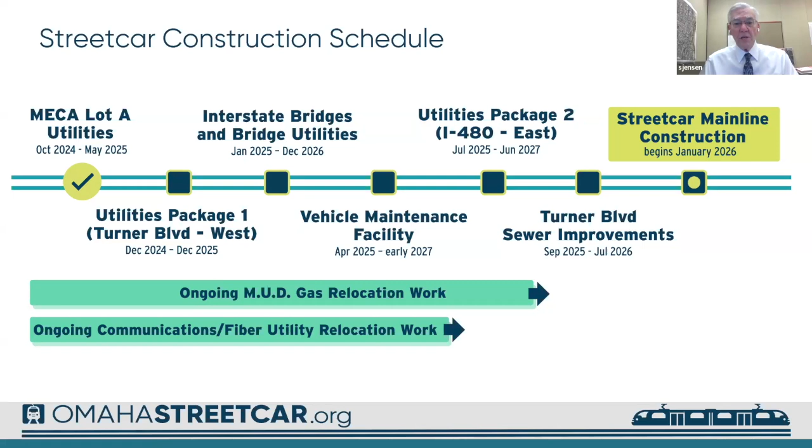So with that, I'm going to turn it over to Megan, and she can discuss the MUD work. Thanks, Steve. Megan? Good afternoon, everybody.

The remaining work for this phase, we're in phase 6 in Harney Street, includes individual gas work for Voodoo Taco, Jams, and the 406 Dubliner buildings, which will take place in the alley. For the Voodoo Taco service, we plan to extend our gas main from Farnam to just north of the Voodoo Taco building and then run their service west to the proposed meter location. For the Jam service, we plan to install their new service from the existing gas main in 11th Street to the southeast corner of their building. The alley work includes service work for the 406 Dubliner buildings.

After all gas service work is completed, our construction crew will come back to this corridor to cut off the old main at 15th Street. All of these businesses will remain open during this time. We anticipate this phase to be entirely completed in November.

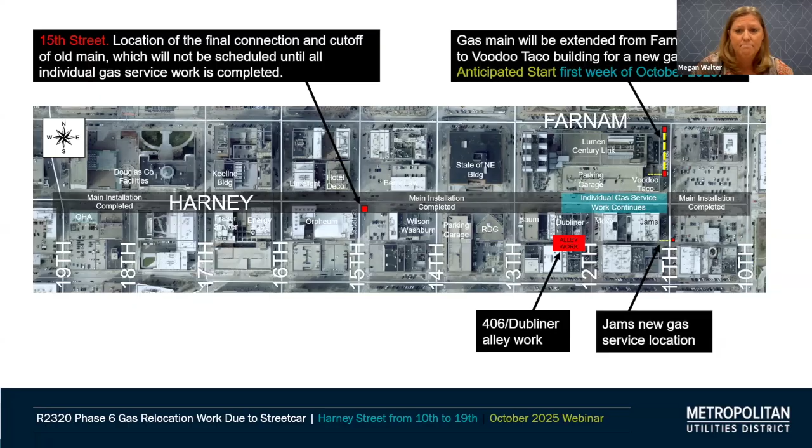So our next slide shows phase 5 in Farnam Street. The work currently at 24th Street should be completed by the end of this week, and then we can turn street repair over to the city of Omaha. The crew will then move to near the alley between 24th and 25th Streets by the International Cafe. Watch for traffic control measures to move west in Farnam. The alley on the north side of the Farnam will likely be closed to traffic for this work. This portion should take about 2 to 3 weeks to complete.

When the crew gets to 25th Street, parking on both sides of Farnam will be impacted. Farnam may be open using one lane of traffic, and there may be a sidewalk closure with the detour. Please know our crews are always reassessing traffic control measures to ensure the least amount of impact possible while continuing to work safely. We anticipate this phase to be completed early February.

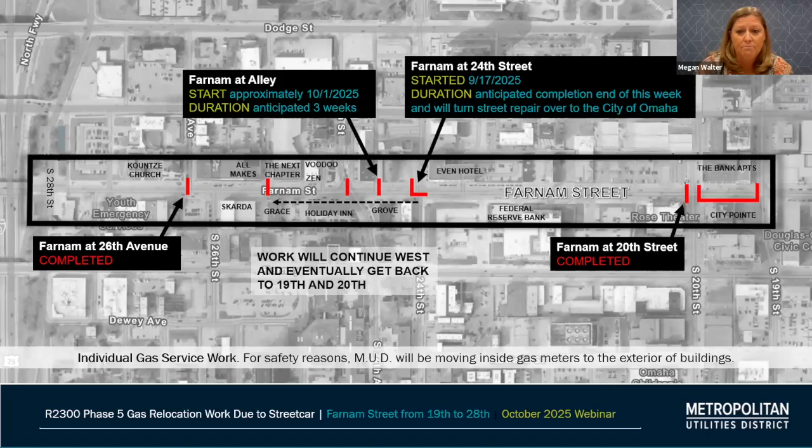So in our next slide, we have phase 7 in Harney, east of I-480. The construction crew continues to install new gas main to 24th Street. This is the stopping point for the new main installation. A separate construction crew will be replacing and or reconnecting individual gas services from 26th to 28th Street starting next week. This work may include additional excavations in Harney. Eventually, more gas services will be worked along this corridor.

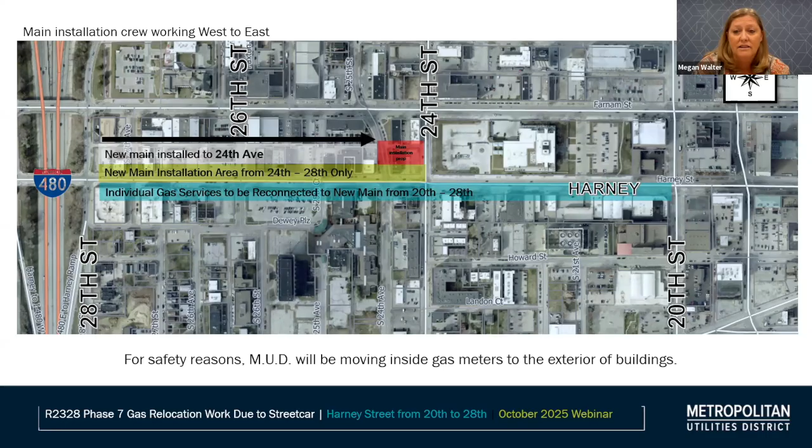While no new main is to be installed from 20th to 24th, we still need to ensure gas services are deep enough for future streetcar tracks. Watch for small holes to be dug along Harney for this work. We anticipate new main installation work to be completed in December.

And then finally, this slide shows all of the phases, and the ones in red are the ones that we're currently working in. Phase 8 work in the Turner Boulevard area will be scheduled to start late this year yet.

And as Mr. Jensen mentioned, we want to strongly emphasize the importance of safety in construction areas. Pedestrians should use extra caution around any open holes or excavated areas, and drivers are urged to slow down and proceed carefully when passing through the construction zones.

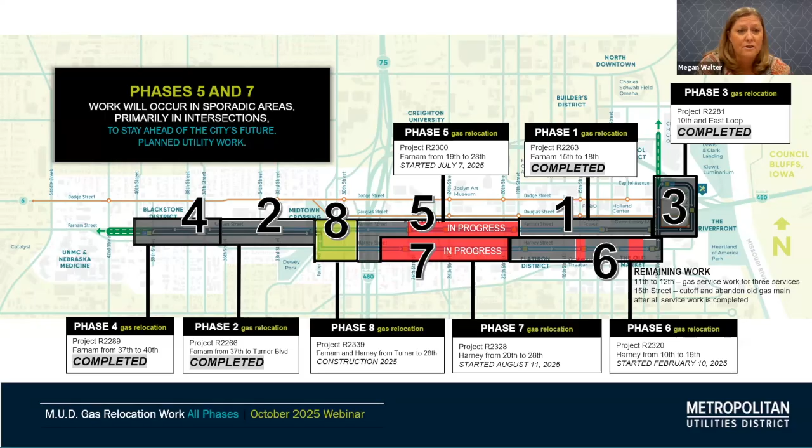I'll pass it back to Steve. Thank you, everyone. Thank you, Megan. I'm going to now hand it over to Mike True and Steve Rue to discuss the vehicle maintenance facility, the utilities west package, I-480 bridges, east utilities package, Turner Boulevard, and the main line construction. Thanks, Steve. Okay, Mike?

You can see right here, this is the ongoing work at the vehicle maintenance facility. On the picture on the right, you can see several people have been asking exactly where this is. This is tucked in just back behind the interstate in the former MECA parking lots for the CHI Center, which on your right, the left edge of that picture is the CHI Center, and just to the right, you can see the luminarium.

The picture on the left shows a circular piece of steel. It's filled with concrete and 2 L-shaped bars coming out of it. That is your piles that are then, after being driven, are filled. And currently they're pouring a large mat foundation slab to bring them all in. Later on this month or early next month, we intend to start getting shipments for the vertical components. And through the winter and spring, you'll see this building start to actually come out of the ground.

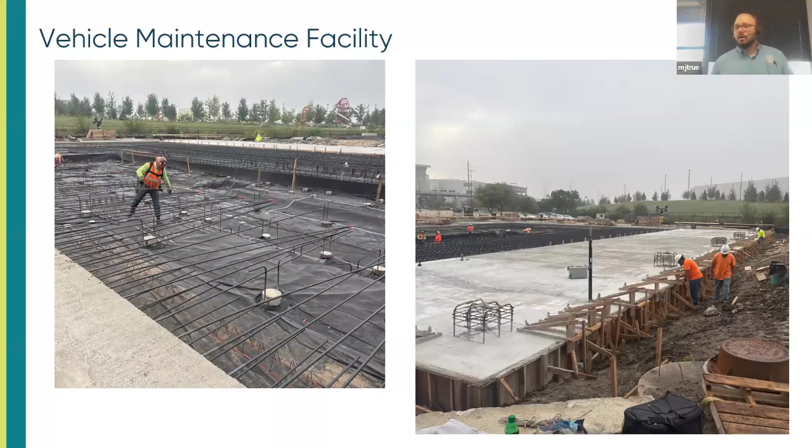This is the utilities west package. For those who haven't driven out this way, Farnam is just one way west. Most of the work is now concentrated essentially from 36th to the terminus.

This is on track to be wrapped up by the end of the year, which is some good news there.

If you notice, there are no parking stalls. So if you don't have on-street parking in the area, we encourage you to use either park on an opposite street, or there's the main parking garage there between 37th and 38th, or there's a smaller lot at the western end along 40th and Harney.

There will be some upcoming closures as they finalize water main installation along 38th, and that'll be the last major hurdle as we go through this end of the process.

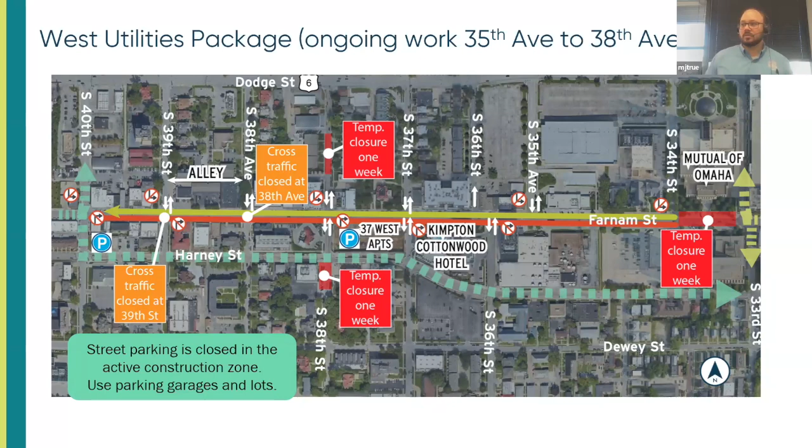The I-480 bridges, as those of you who've been driving along and coming in, myself being one of them, Harney actually looks like a bridge, and they're wrapping up work there. That's still on schedule, also to be wrapped up by the end of this year.

28th Street is going to remain closed through the remainder of this month. Maybe hopefully last week or the first week in November it'll reopen. Some of that is our work, and then that same cordoned off area is simply going to be handed over to OPPD, who has some significant work to do in and around here.

So instead of opening it and then a day or two later shutting it down, we're just going to hand it off to OPPD. You can see here there's some alternate paths to get off, with the Harney exit being closed at 28th. Once Harney is complete and signed off on, accepted, then they will begin early next year to start demoing and rebuilding the Farnam Street Bridge.

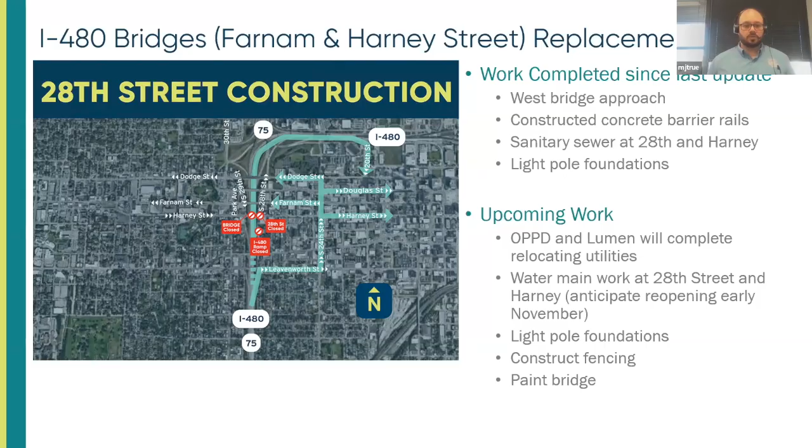Next slide. East Utilities package. So any of you east of I-480 have probably started to notice the several different construction crews and groups around down here and all the new traffic controls that have popped up.

They are focusing mostly on the more eastern end of this particular utility package, trying to get things through. We're working with, for instance, at 8th and Douglas, some developers there to try to minimize what impacts we do have going on.

If you see something that's changed, you can always feel free to reach out to the team and let us know. As mentioned earlier, there's been pedestrian traffic and other coordinations that have come up, and some of these road flips, especially with the utility side, can happen in a day, and maybe that MOT isn't quite set up right. So let us know. But we're going to be starting at the east, generally working towards the west.

You have an electrical crew out there. You've got a couple of different crews for sewers, and you have at least one crew right now for water main. That may go up to 2. You're going to have 4 or 5 of these different spots where you'll have traffic control, then it'll go away. They hope to have this all wrapped up by middle of '27.

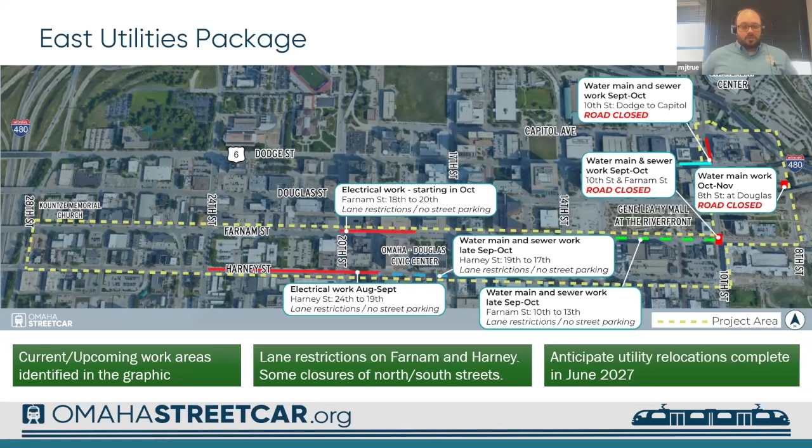This is focusing in on, sorry, my own screen has a pop-up now. All right, so this is the 10th Street area. Right now, we're trying to finalize the water line that goes along 10th.

So there's several alternate routes that have popped up. This is somewhat dependent also on the 8th and Douglas work. We've got to get things wrapped up there first, so that way when we actually do the final closure of 10th to complete some of these connection points at the north and south end, we can then once again reroute traffic. More to come on this one.

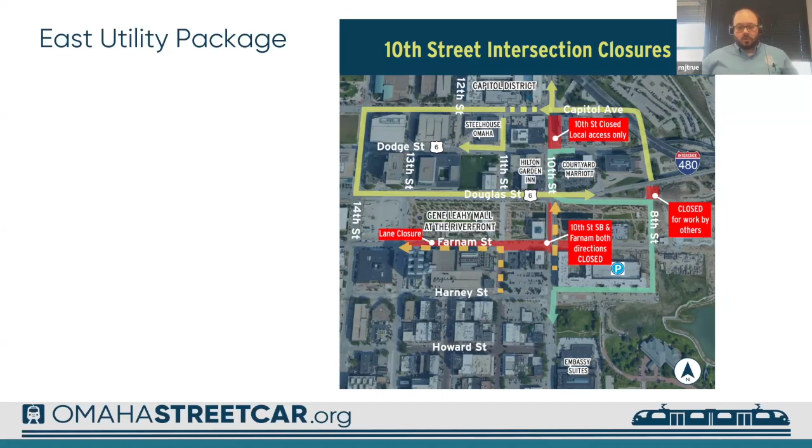Turner Boulevard. This is the final package that got bid out. They are going to begin doing work on this early next week. Most of it will be minor work, going out and just potholing, drilling down, actually just finding where other utilities are at.

There will be a full closure at the intersection of Farnam and Turner starting January of next year through the middle of April. That will coincide with the demolition of the bridge. That is going to be the only full closure at that intersection that's planned.

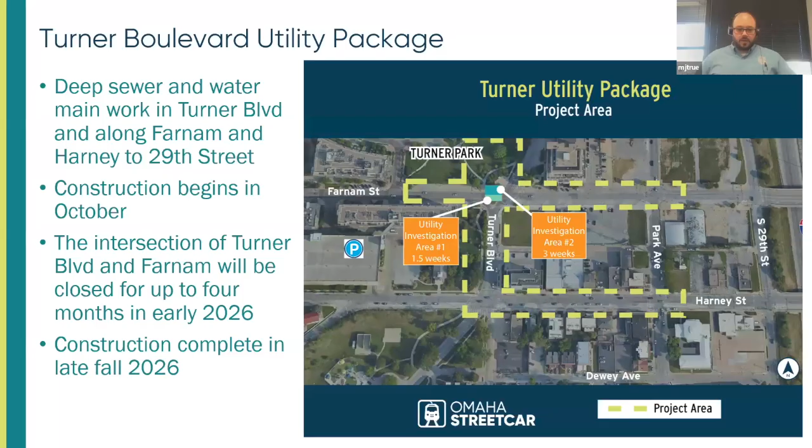There will be, just like any of the other utility phases, other MOT in and around the area that you will see. We hope to have all of this wrapped up by fall of next year.

Mainline track construction will start off near the Turner and Farnam intersection on the north side of Farnam, and then proceed west. You'll see a series of about 6 crews come through.

That is followed up by a civil crew who will do some additional stormwater, traffic, communications, and some of the direct power for the actual system.

Unlike utilities, it's a lot more linear. You aren't going to see nearly as much movement to the side. They might have a few connection points here or there, or they might have a bump out where they're working on a side stop.

Oh, sorry, I already said that part too. All right, next slide.

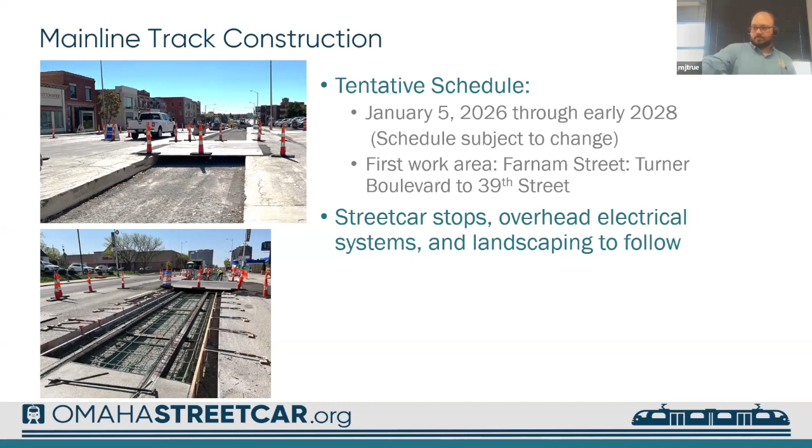And we'll turn back over to Steve for business support.

So in terms of business support, there are a number of things that we've been doing throughout this process. We understand the difficulties that construction can cause. It's been very disruptive, we understand that. But there are a number of things that we're doing to try and help.

As we said a couple of times now, if there's something missing, by all means get in touch with us so we can try and get anything that needs to be changed done quickly. But here are a quick list of some of the things that we are working on to help through this process. First, there's overall communication.

On the Omaha Streetcar Authority OSA website at omahastreetcar.org, you can find construction updates and an interactive map that shows up-to-date information by area. There's frequently asked questions there, so you can get a lot of information on the website itself. Wendy also does a weekly construction update email newsletter. I know I look at that, and it's very helpful to keep you up to date with what's going on week to week.

And then, of course, we have these monthly construction update webinars. On a day-to-day basis, you can always contact Wendy, as she's our contact person in the corridor, and she can help get you in touch with the right people and pass along whatever it is that you're calling about to try and get resolved.

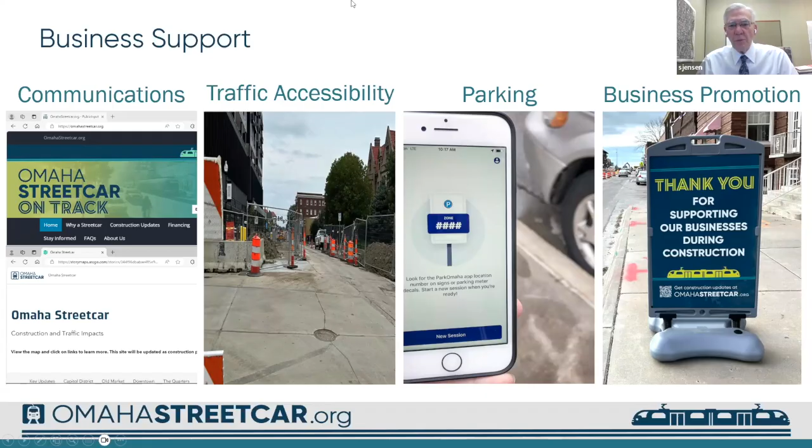Mike mentioned going forward we'll have another complete shutdown that will take some time, but other than that, we try to maintain that one-way westbound traffic whenever we can. Same thing with those other areas—we try to maintain at least a lane when we can to maintain traffic in that area.

Outside the construction zones, we'll maintain standard traffic configurations at all times. As we mentioned earlier, there will be directional traffic signage and directional pedestrian signage along the route, so we work on that as well. With regard to parking, Mike mentioned that we are also maintaining access to off-street parking in the construction zones.

We've added directional signage to help direct people to those parking areas. We maintain unobstructed on-street parking outside of the construction zones. The parking division has worked through their parking partners program to open area parking that may be used by businesses during the day, but allow it to be opened at night and on the weekend for people to use.

We are also providing 2 hours of free parking in the new Blackstone garage, and we're working to try and help with parking in that area in particular.

With regard to business promotion, we've added business advertising and support signage throughout the corridor, as well as business wayfinding signage to help people find their way to the businesses while construction is going on. We've put banners and storefront window posters along the route, and we also do business promotion and advertising on the Omaha OSA Streetcar newsletter that is sent out periodically.